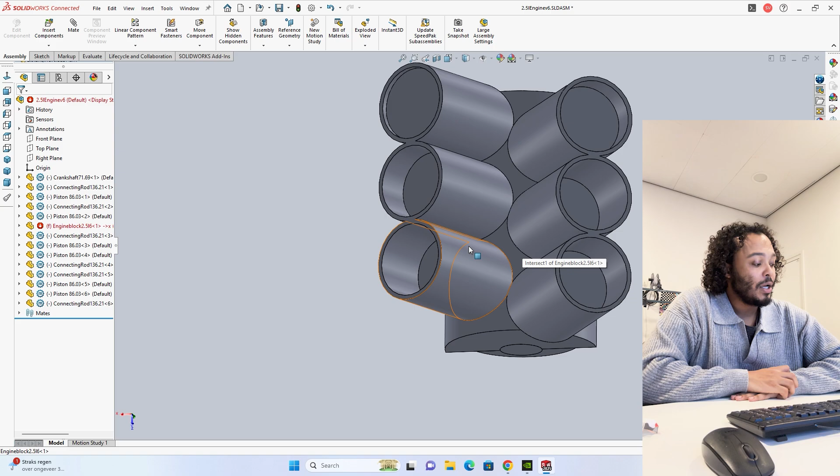Let's get into it. First and foremost, what I'm going to do is create another part based on this design. I'm going to select this side surface and add a new part to it. From this surface, I'm also going to make a sketch using the circle tool, aligning the rotation point for the crankshaft and the outer wall of the actual engine block. Let's also convert entities on those to make them a little bit more narrow.

Let's keep those at about 1 centimeter. I think in real life it would be less thick than that, but we can add and change that in a later stage. So let's make that half pipe from that surface up until that one right there, and that is basically the first part of the oil pan that we need.

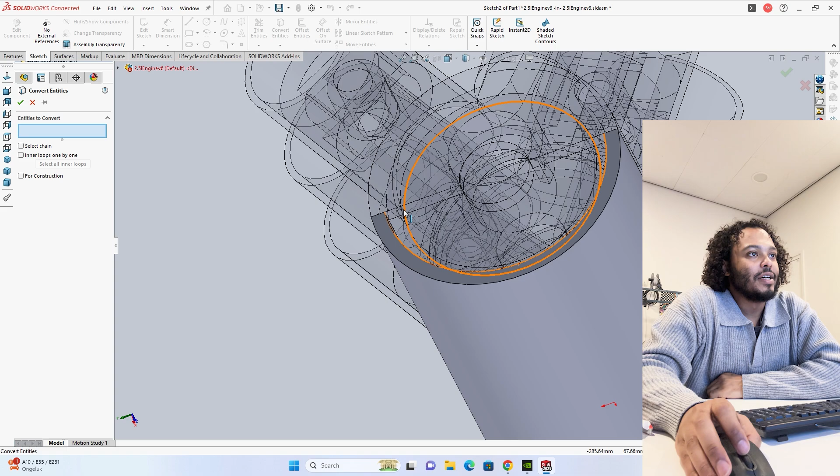Then I usually select this surface and convert entities on the bottom sketch of the engine block, so that you get the spaces in there for the crankshaft to rotate on. But also what we need to do is cut these center sections out, because we basically need to make it a hole. So we're just going to cut the hole out from the side instead.

Let's go and then trim all of those lines out of there, and that's basically the trim entities tool. I don't think I've used it before, but with that you can cut into the lines that you need. Then we're going to select that sketch. I don't really need that line, and then we're going to go up to surface, and we can select that surface right there to make sure that everything encloses it.

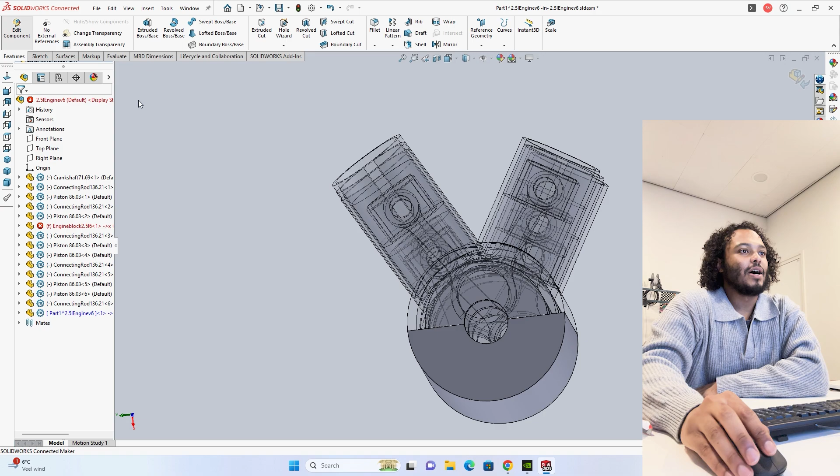And then also what we're going to add is the hole finally for the crankshaft actually rotating. There we go. And then also usually there's a flat bottom to it, because at the bottom of the oil pan, this is where the oil will be connected. So what we're basically going to do is make a system that can pump that oil out to make sure that it keeps at a certain level.

So to do that, I'm going to make 3 points within the bottom section of the oil pan that will sit from here, go to the right or left. At this point it doesn't really matter too much, but this is going to be asymmetrical, because the pump for the actual motor oil is going to sit on one side of the motor. You're not going to have the dual pump setup, at least not in this case.

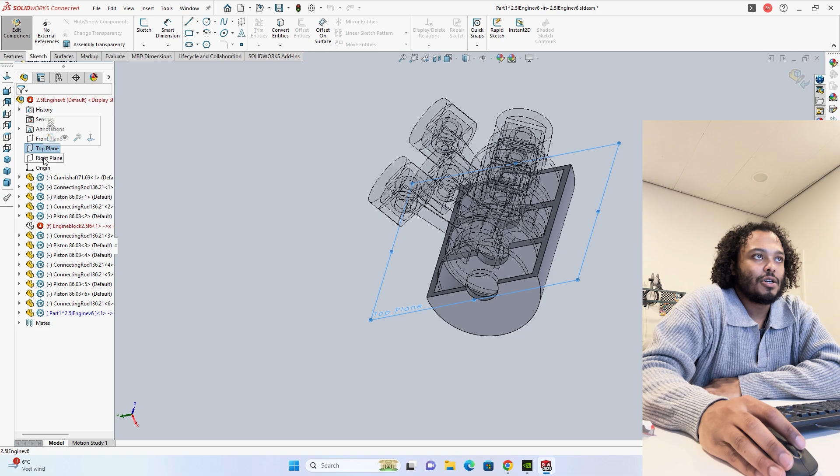So what I'm going to do is click on the oil pan again, click on edit, and then find the right plane. That will be good. And then we can click on these interior surface walls. I don't think the actual surface will work, but if you select these lines, I think that will be fine. Here we go.

And then for the final section, you can see the whole thing spaced out to where the middles will also be. Let's trim those entities off, and then we can find the middle section. Let's say one of those bumps is about 3 centimeters in diameter, so let's make it 15, and then we can make this one line up with the bottom. Let's say tangent, but let's keep that at 15 radius. And then we can take this one and place it over here as well.

From that point forward, we can extrude these circles, but now up to surface, so let's keep it up to surface, but let's start them from the side. Why isn't it showing the third one? But we're going to start it from this vertex right here. Why isn't it showing the third one?

There we go. And this would basically be the pipes that will allow for the fluids to be pumped out as soon as we need them to. So to make them pipes and hollow, we're going to select offset entities, reverse it.

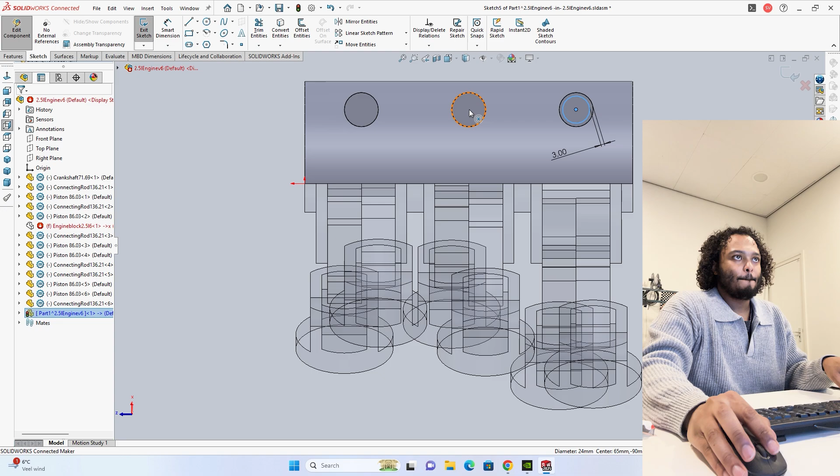Let's make it 3 millimeters for the outer wall. And then we can copy and paste this right here, and basically cut extrude those out up until this surface.

And those would basically be your motor oil evacuation pumps, in order to get all of that motor oil out as soon as they've been injected back into the system. And then we would also need to have a mount that we would place here so we can attach the motor oil pump to.

But I think I'm going to make that in a later stage when I'm actually working on the belts and everything for the connecting rods and stuff, when we're working on the cylinder heads. So for now I'll just keep it like that.

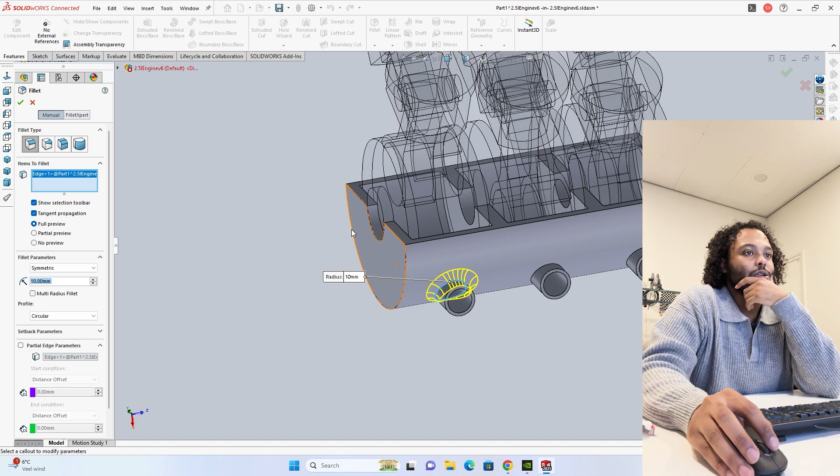It usually depends on how you would make this, if it would be a CNC cast or a CNC milled piece or a casted part, but you would have these fillets or stuff that you'd be putting around these tubes, something like that.

And then what I also need to do is add an ability to bolt this down to the motor block, because there's a lot of rotational and centrifugal forces on the crankshaft and everything, so I need to clamp the bottom end to the top end of the motor.

So what we're going to do is create a bolt pattern we can use for that specific purpose. Let's put it like that, and place like two - let's say 4 millimeter radius, so that would be like an M8 bolt or something.

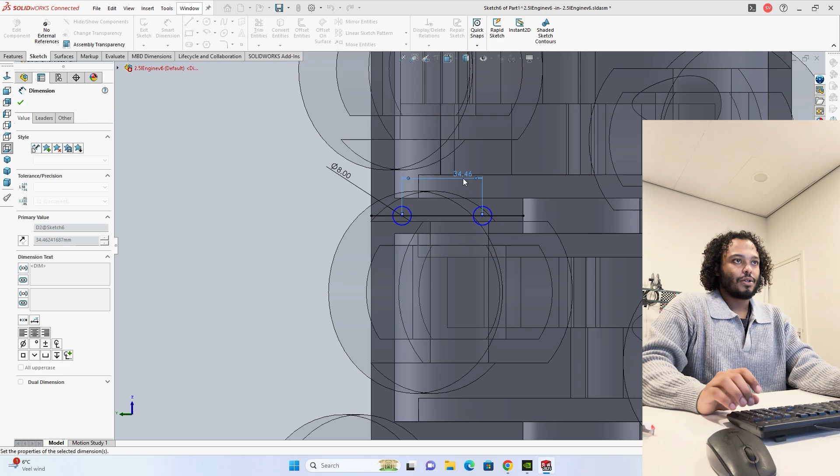Let's make it a little bit consistent, let's say 8 again, and let's say these are 30 millimeters apart - maybe 40 should be better. 40.

And let's say it's about 7.5 millimeters from this sidewall right there, or from this dot, I should say. Let's make it 10 - I think that will be somewhat centered.

And then we can basically take this and duplicate it to the whole, to the other parts. Oh no, that's not going to work like that.

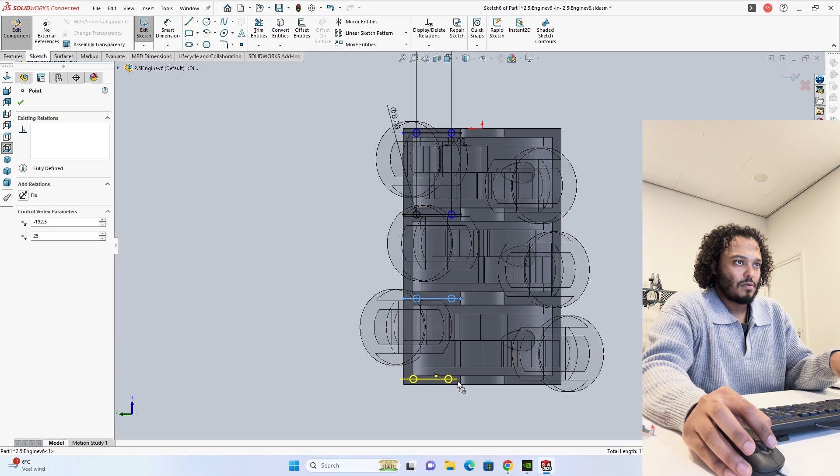And then we need to mirror that to the other side, so we can use the center point of the engine block, and mirror entities, mirror about this line right here, and there you go.

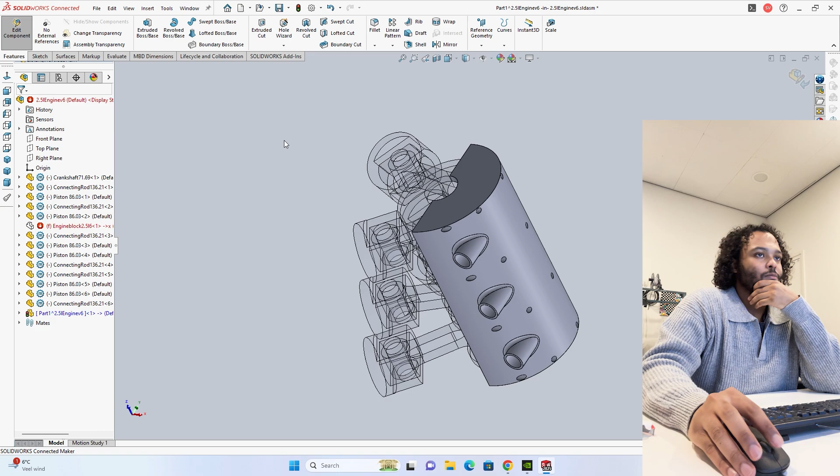So basically now I can cut extrude those, all of those circles. That would give us all of the holes that we would need, but as you can see, it would be hard to thread a hole down if it's not flush on the surface.

So what you can also do is go back into the part and drag it just right above the cut hole that we have right here. This is like the roll bar where you can select the stage of your design that you want to be in, so you can hide the last move that you just made.

And then we can also extrude basically this same shape that you have here, but we don't want it to interlink, so what we can do now is drag this through everything. I don't know if it should be through everything, but let's see - we can probably keep it a couple of millimeters above the top center.

That should be about 150, I think, or like 80 then. Yeah. And obviously you won't really be able to see that top. Let's make it 85.

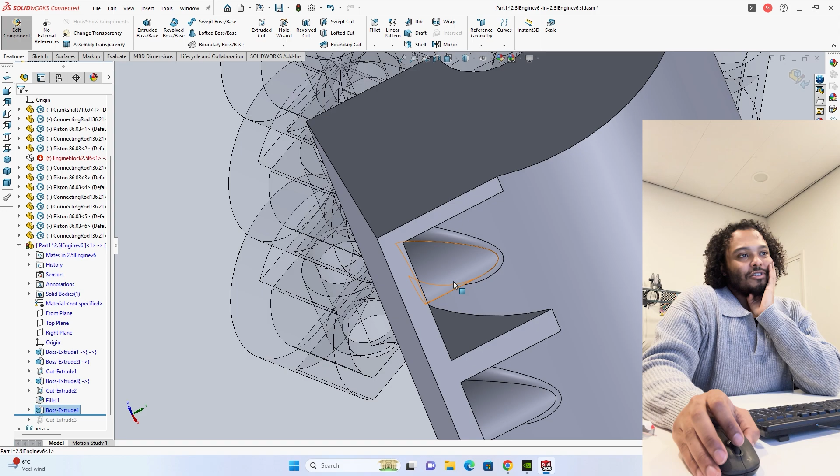And then it kind of defeats the purpose of making the holes for the drainage pumps and everything. So what we can then also do is take that hole and drag it below the boss extrude that we just made. But then we kind of need to add it, I think.

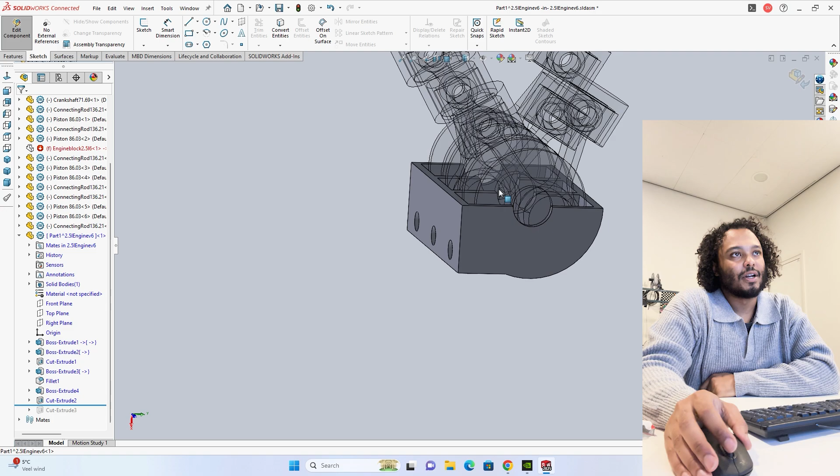So by dragging that action below the actual boss extrude and everything, it helps to figure that out and align everything the way it should. Anything else I should add? Let's also do that to the other side, by the way, otherwise it probably wouldn't make sense too much.

So let's take this sketch again, and also convert entities for those. And there you go. I think that now starts to look more and more like a recognizable engine block, in a sense.

So here we have the 3 ports that can take all of the motor oil, and we're also going to need to make a place on the engine block itself where it can be dispersed. But before that, let's add the water channels to the engine block itself. So for the water cooling, we're going to add to the existing engine block. Click on the engine block again and add it, and click on edit components.

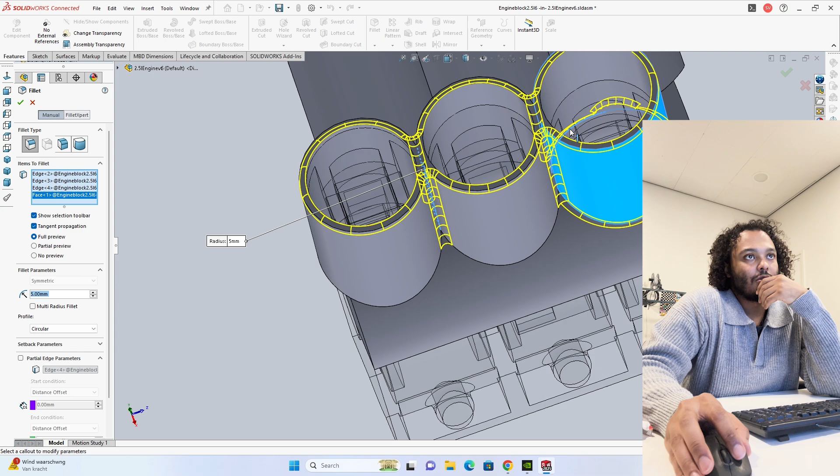First things first, we need to add the actual guide paths for the water to flow through. So I'm going to add a couple of fillets to this line right here, and ensure that there aren't too many crevices existing in that space. That's also why I think a V6 is kind of the perfect size to make, because the larger you make it, the more levels of complexity it adds.

Let's see. So now what we're gonna do is take that shape, and we're gonna need to duplicate a couple of things from the left side to the right side. I'm just going to do it on this bank of cylinders, and then you can copy the same moves again on the other side.

But in this case, all I'm gonna add is simply the water channels. And for that, I'm gonna keep a distance of about 10 millimeters between the offsets, and let's say about another 5 millimeter wall between those.

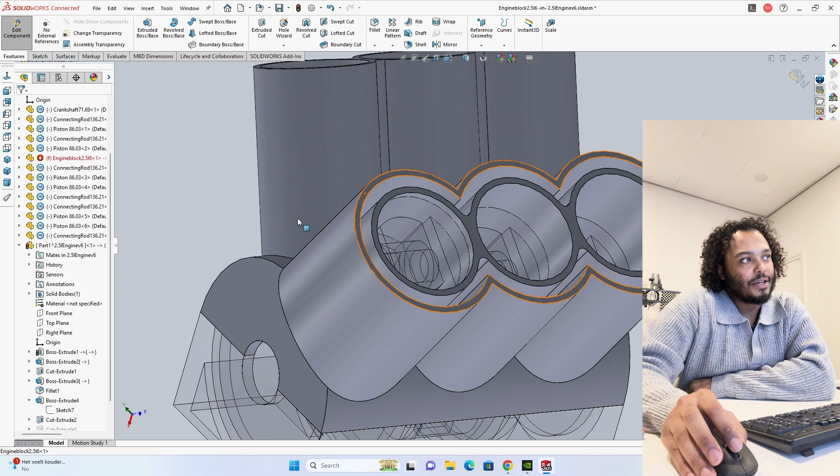And this is now going to be the actual wall where all the water will flow through, I should say. So this is basically the channel that the water will flow through, and as you can see here, there's a hole where it can escape. So we need to extrude the wall a little bit more to go beyond that point.

But I was waiting until this point to see how far I should extrude that part. That is basically the first part, because in this channel the water will be able to flow through everything like I mentioned. But we now also need to look into how we will consider that flow, and what would be the front and back side of the engine.

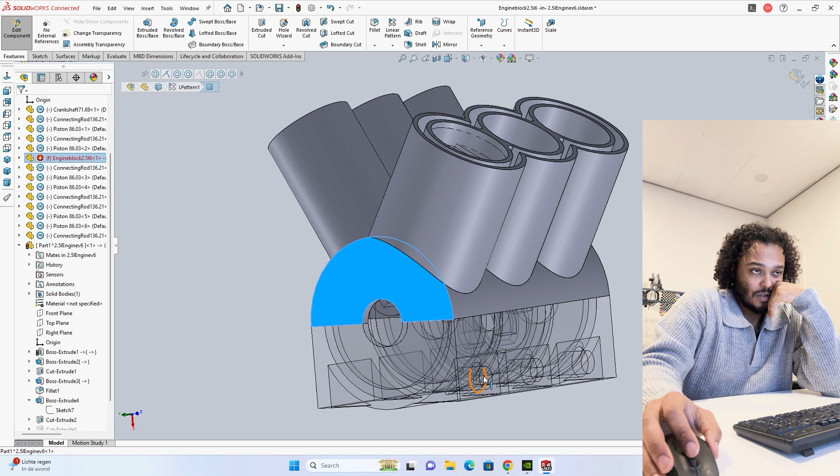Because from here on out we're going to need to make some decisions on where to locate certain things. So I'm just going to say this is the front part of the engine and this will be the back part of the engine, and the way to identify that is with the motor oil pumps sitting on the right side of the engine. That's basically how I'm going to identify it.

So here from the front, I want to let cooling water in, and here from the rear, I want to let out the hot water that has already been through the cycle. There's a couple of ways of going about it, and how you can create that flow within the system. So let's see how we can start to do something like that.

For me, the first part is going to be to make the water inlet, and for that I'm going to create a flat surface to the side here, but let's make it somewhat centered from that circle. So up to there, let's say it's about 25 millimeters that direction, and then 26 here. Let's keep that centered.

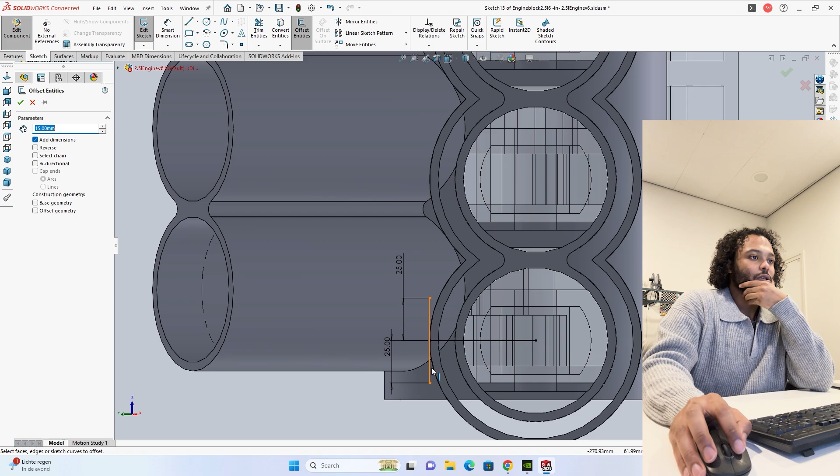And then I'm gonna do a bi-directional line, like 2 millimeters, let's say 3, 4. That is basically gonna be the surface from which we can drag the rest of the thing out. I'm just gonna do this surface now that I think about it, or I think I should do both, so then you can select both of these.

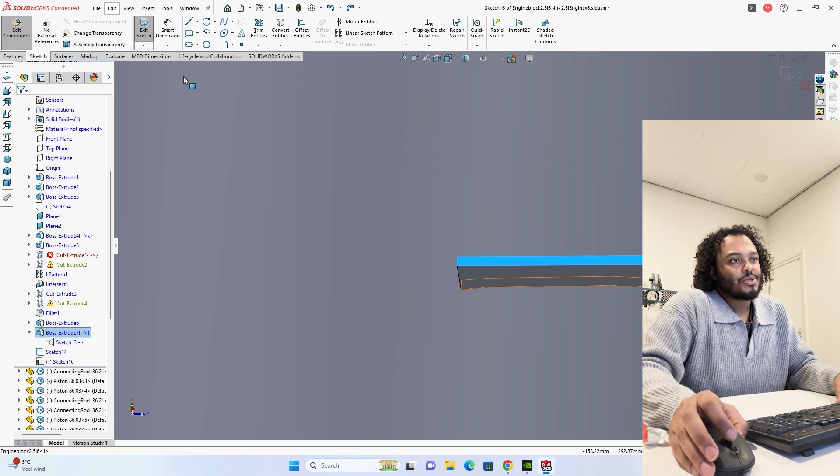Something like that would be sufficient. So now that we've created this surface, we actually have a sketch plane to work on. I could have just made a plane, I guess, but sometimes it just works like that.

And then I can take the middle point, drag a line straight down, do the same from this line right here. I think I need to select it again, and then find its middle point somewhere here. And then you have this intersecting point, and let's say I'm gonna make this 25 millimeters in radius.

And then I'm gonna offset those entities by, let's say 15, let's say 12.5, something like that. And then from these circles, I'm gonna make it like 10 millimeters, and that's where the actual hosing and the pipes and everything will be bolted down to.

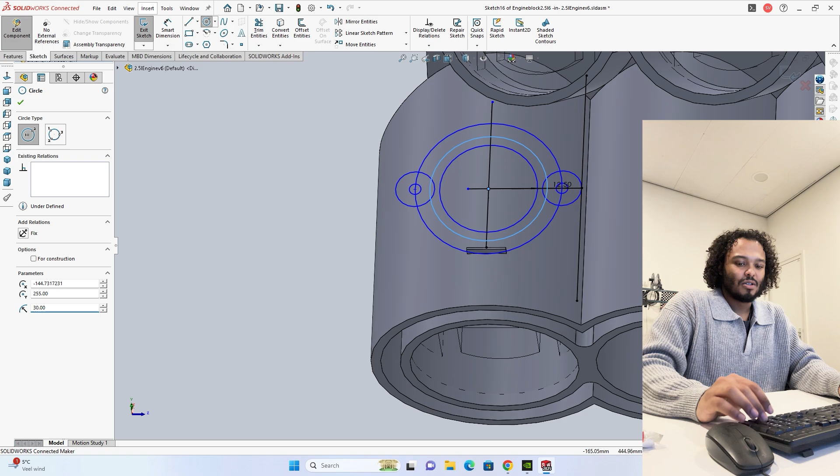And then let's make it like a 3 millimeter radius screw pattern hole or something. And then I'm gonna make it like a 35, let's say 30, I think will be good. 30 millimeter radius for the actual circle that it will fit in.

And then we can extrude boss base all of those surfaces that we select for the actual piping and everything.

Here we go. And then up the surface, so it will kind of fall perfectly to the side of the wall. And then there you have the first attachment that you would need to actually have some plumbing and everything attached to the motor.

And now we're gonna make also a hole to make sure that the water can actually flow through it. Let's see, right there.

And then we will need that one to go up to that surface and continue on into the actual sidewall itself. But I'm actually also gonna add one more thing to it, that cut extrude that it just made, and that is this little tab that I used to kind of make the sketch surface.

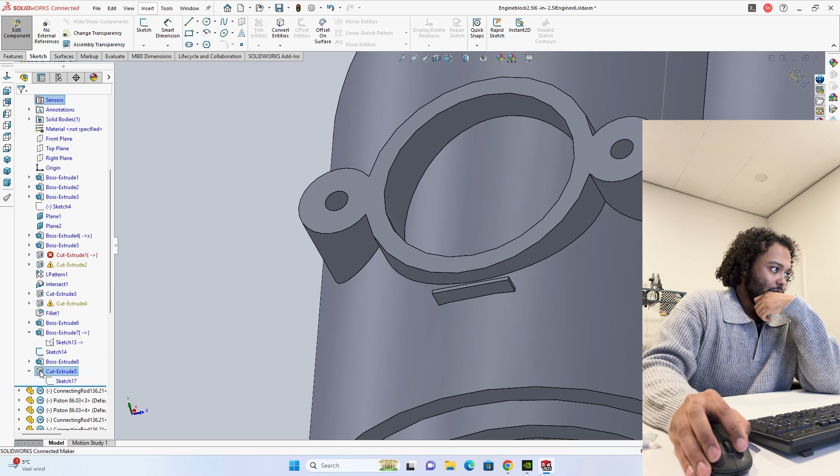So I'm gonna add that to the actual sketch, use convert entities also on those. And then from that point forward, you can see that now it's been cut through completely, but that was not intended. Also, yes, I guess I do need to make it into two separate.

Yeah, I can just stitch this back up again this way. I guess it doesn't matter too much. But like I said in the previous video, that kind of is the freedom that you have within SolidWorks to do it your way. Multiple ways of going about it that will get you the same result.

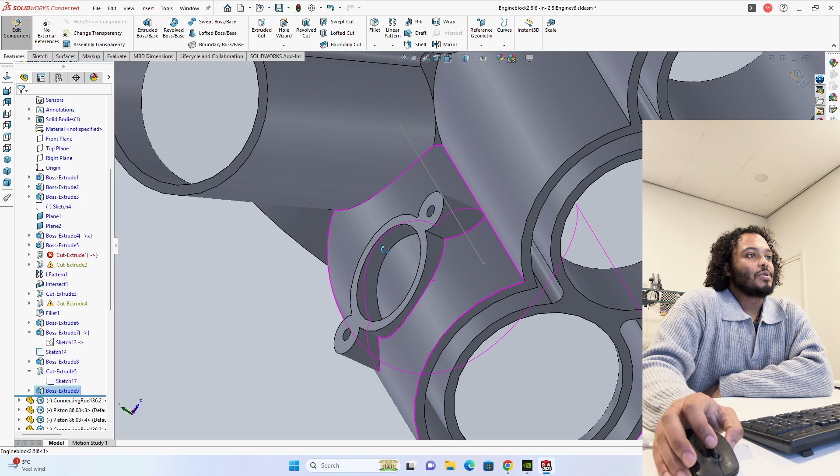So that is basically now the first component. Let's also add some fillets and stuff to the basic engine block.

So before I even place those, because I feel like those will interfere with each other a little bit, let's add this fillet curvature also to it.

And these shapes, by the way, also make engine blocks extremely strong shapes and everything, because it's just a lot of circular shapes and different angles standing against each other.

So yeah, sometimes you see that some car manufacturers use the motor to actually also mount the suspension components to it, or as a structural member of the frame, and that's basically why, because all of these circular shapes interacting with each other make for an extremely strong structure.

So then we can take this bar again, put it back in the rollback state, and then you'll see these kind of come into play.

And then also for this surface, I'm going to add some fillets to it and the corners here.

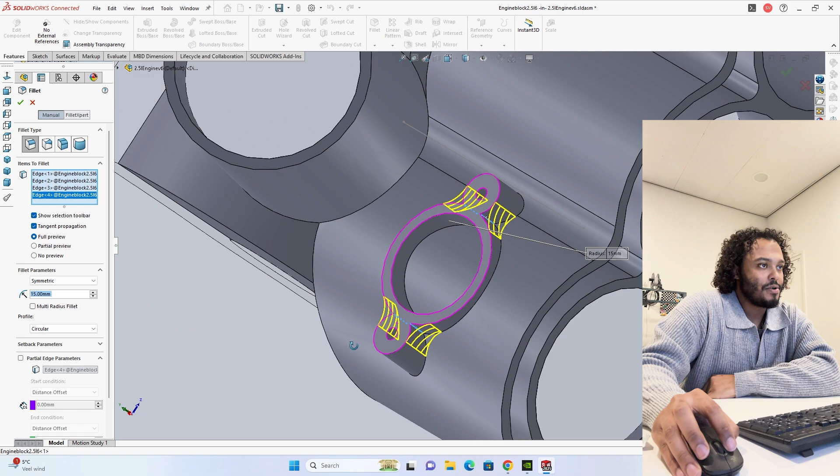Also make it a little bit of a surface area for like gaskets and stuff if you want to prevent leakages. All that type of stuff kind of comes into play when it comes to making these type of parts, especially if you're dealing with fluids that are pumping through a surface and stuff, you know.

So that is the first part. And then basically what we'll have is also the same right here, and then there will be one pump, like a pipe that's splitting into two, that is feeding cold engine air or cold engine water that has just been through the radiators right in here.

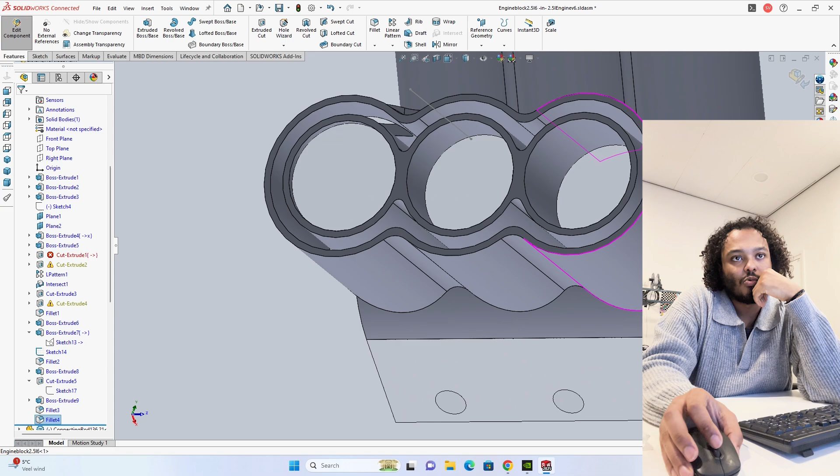And then that will be able to flow through all of the cylinders, and then there will be an extraction point right here. So that is also the next thing that we're gonna make, is basically the same thing but then end up making it here.

So what we're gonna do for that is actually take this and click on extrude cut, click on convert entities. Let's also use the actual bolt patterns and everything, and also the hole itself in the convert entity, so we have all of those dimensions already lined up.

And then we're gonna take this middle point to basically transfer it over to the other side.

Mirror entities to mirror those, and we want to mirror that about that point right there. We don't need it to copy, we just need it to be transferred to that side.

Basically boss extrude it up to this surface again, but we don't want it here. We want it to actually offset, like so.

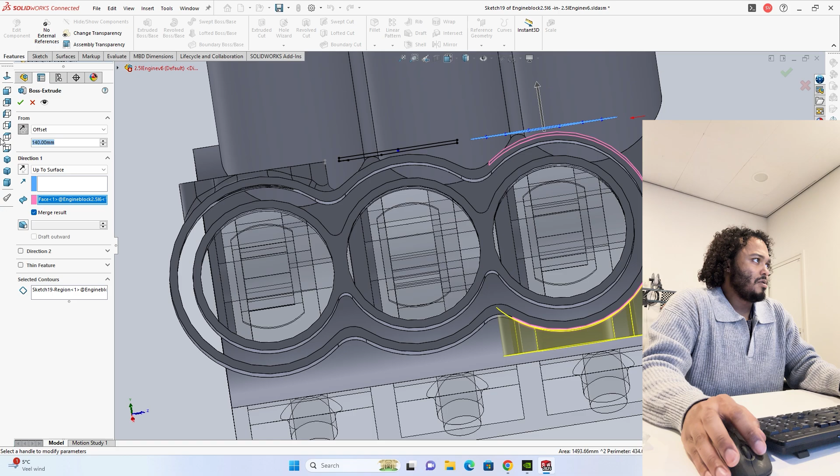Let's say it's like 135, I think, then something like that would be kind of similar to what we have on the other side. And then we need to cut it, cut the hole out.

And there you go. Also, let's add the fillet to it as well. Or what you can also do is basically take the fillet and drag it below the latest pieces that we just added, and then right click it, add it, and then also add it to this part, so that we can use less moves in total to get the same thing accomplished.

I don't know if that makes the files larger, or if you have like a taller feature tree. I have no clue. I should test it actually, but we'll see.

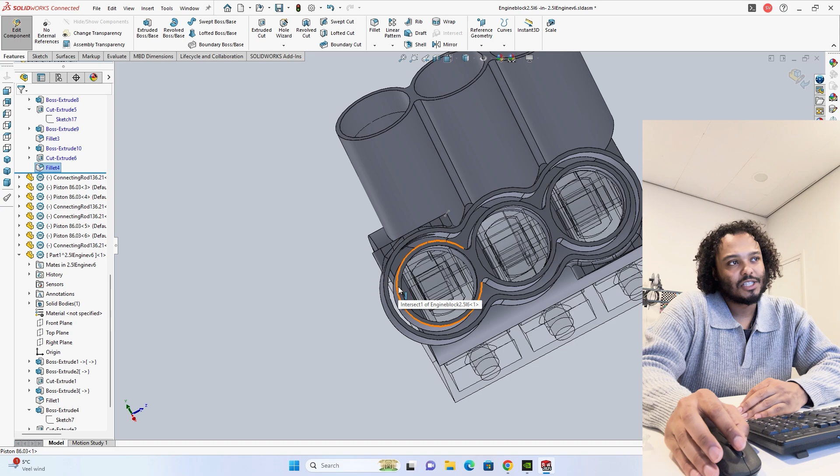Just in case you haven't picked up, the cold water that just been through the radiator will flow through all of these and then exit here. And I was also thinking maybe you can add channels to guide it better and make sure that the flow is optimized internally, in order to also use the least amount of cooling that you actually require.

But there's still a lot we can figure out and get into in later parts of the video.

The next thing that I do want to get into are the actual bolts that are gonna attach the cylinder head to the engine block.

So those usually sit right within these sections to separate the power points and everything, or the stress I should say. So those will be quite significant, you know. So those are also like strong bolts.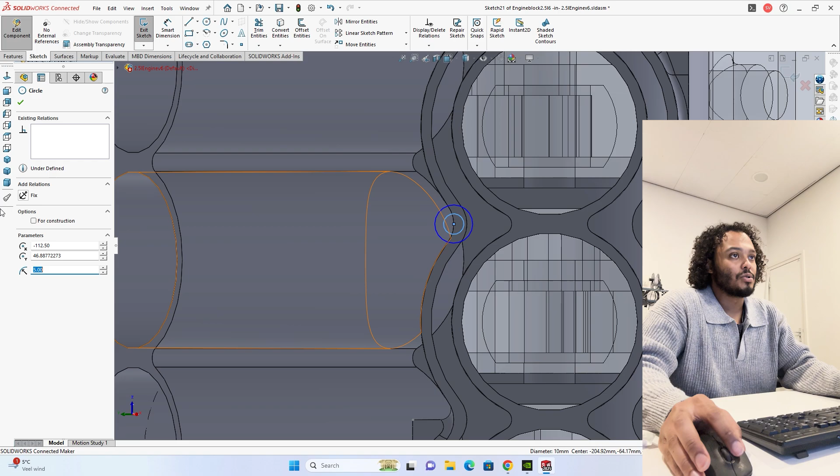Let's use like an M10 pattern or something, and also make a 10mm outer ring. And then I'm gonna use these on the same points that we've added those to.

And then for the next part, I'm just gonna make it intersect right at that point. And let's also do the same right here.

You could also make a pattern which is equal left to right and everything, so that you can make the cylinder heads a little bit more modular in a sense. But for this case I think I'm just gonna make it a little bit more custom.

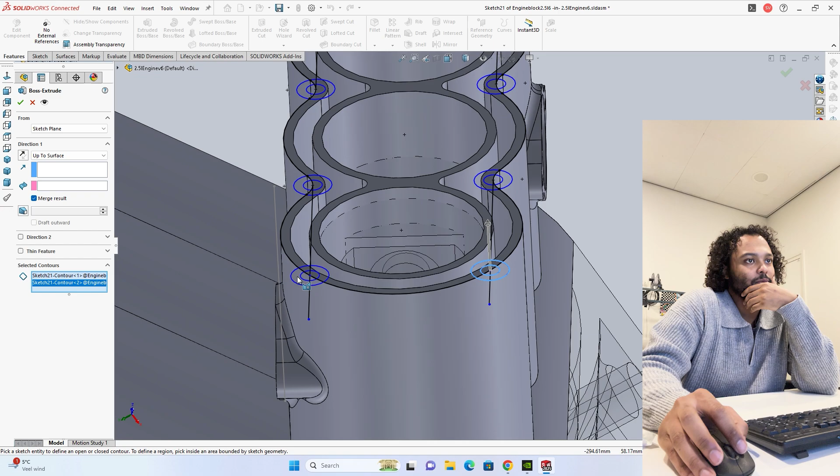Like so. And then basically what we can do from here is drag them down all the way to the bottom section, all the way to this half circle again.

And then we also need to cut extrude all the holes, obviously, same kind of pattern. So just use the same sketch, click on convert entities, and then take all of those bolts out. And let's make that, you know, let's just keep it up to surface again, I guess.

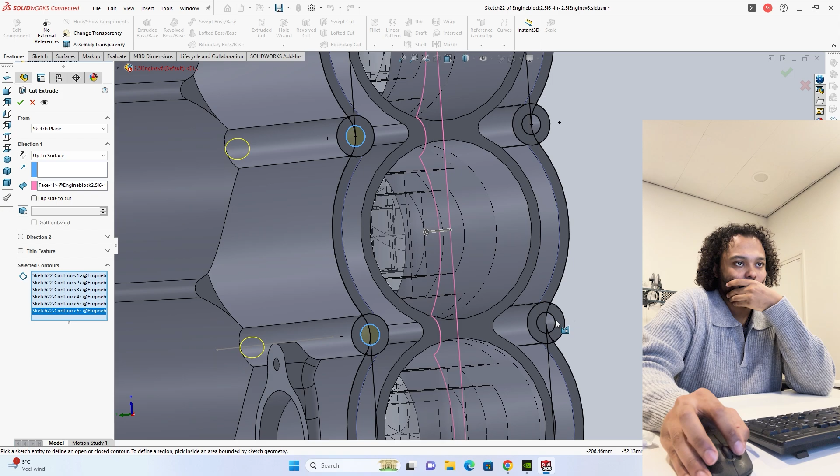And now that we've cut all of those holes out, it starts to look more and more like an engine block, yeah, like you would see it in real life, I guess. And that is also the purpose of this video in particular, to get that resemblance.

But also make it in a way where these bolts are actually in there, so that we can also 3D print it and actually produce it, because that is kind of what I feel like these tutorials should have, is that we also showcase the process of actually making this a reality.

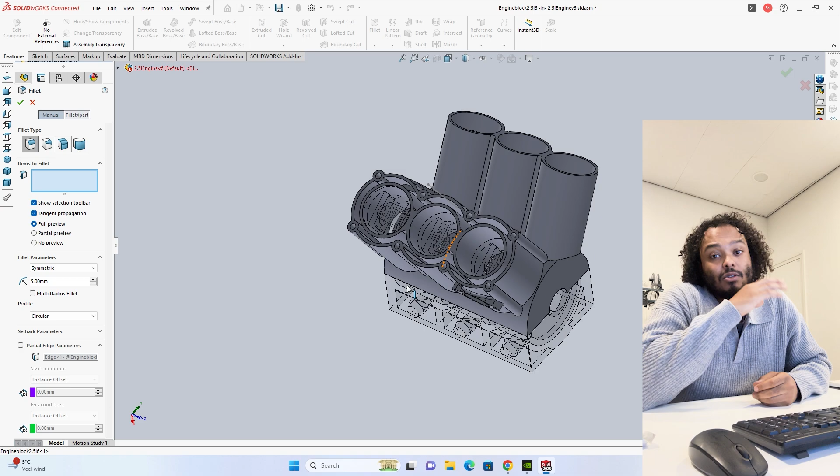So that is gonna come after the complete engine is finished, but you can look out for that. I'm gonna 3D print everything that you see here, but at scale. So we're gonna change it before we print it as well, but you'll see. Let's see, what am I forgetting before I move on to the next part?

I think this is everything for the engine block. I think maybe the motor oil channels too, but I could do that once I've also added the other side. I think that will be better. So yeah, next I'm gonna basically do everything I did here and then duplicate it onto the other side.

But I'm looking at a method that I could use to kind of expedite the process a little bit. I think I know what I'm gonna do. Yeah, I'm gonna add the fillets also to the bolt patterns. Can I select all of these at once? I think I can. There you go.

Let's make that like a 5mm radius if possible. There you go.

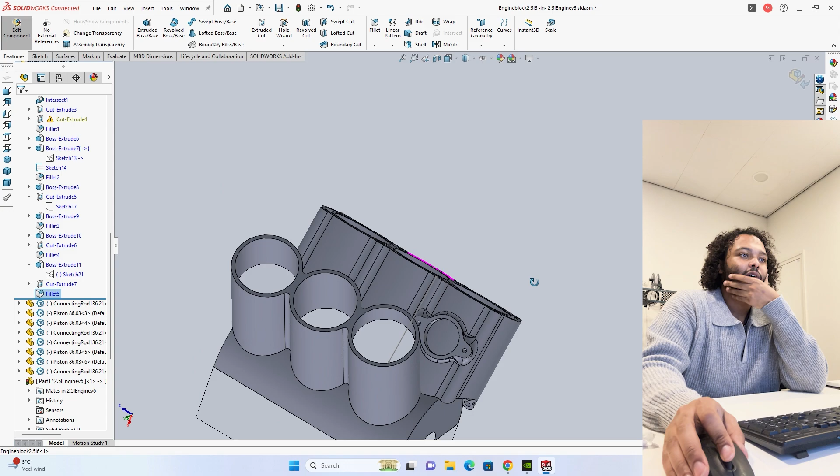And now with that in place, let's select this face again. And also, because we have added these bolt patterns and stuff, there's usually some cross members that engineers end up making between all of these lattice works and stuff. And I'll show that in a second. It will kind of allow a little bit more rigidity between the actual piston walls themselves and the outer wall of the engine block.

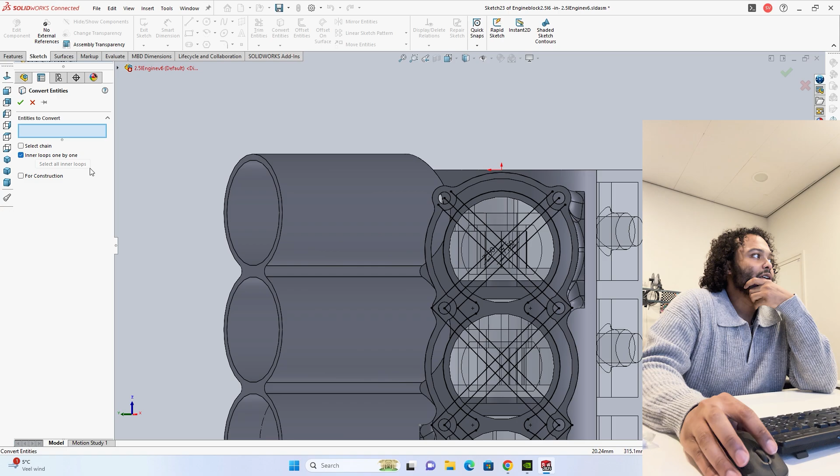And I'll basically use offset entities both directions, let's say 7.5, something like that. And then offset entities again, select this surface, and inner loops one by one selected, again select that one. And then from that point forward, we can basically extrude all of these shapes.

And let's make that about, let's say, 10mm go into the engine block. There you go.

And then also I will always kind of add a fillet to also all the sharp corners. I think that will be good, but let's say it's only like 3 millimeters or something.

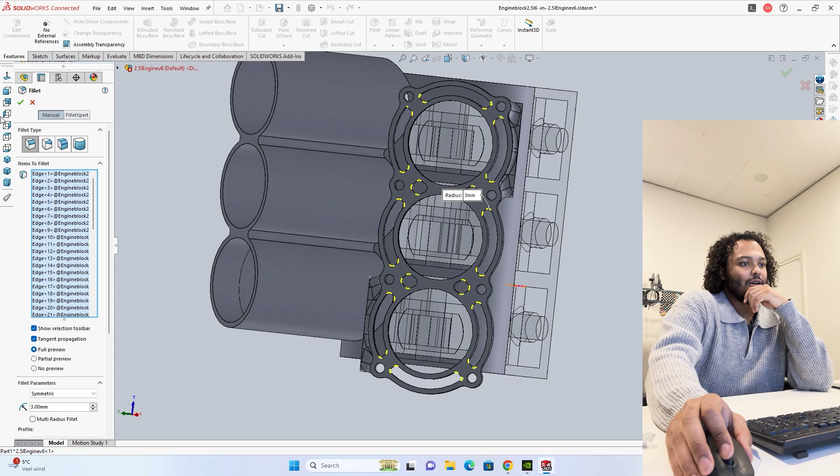I think there are a couple of double lines in there. And that was actually the perfect one to take out, I guess. Something like that. I guess it's still not gonna work. Let's take all of these out. We can add those at a later stage.

And then keep this at 5, 10, 8, somewhere. There you go. And then these holes, the reason why I don't really like fully closing it off, because you...

Actually maybe could even, but these holes would then allow the water to kind of flow also into the cylinder head, because with the cylinder head there's also a lot of hot exhaust gases coming in and stuff like that, you know. So you kind of want to maintain that at a lower temperature.

But it might also be cool to look at that, maybe close it off at this end of the motor, because here only the air intake will be coming in, so you don't need to have maybe warm water running through it, and I don't know, we'll see.

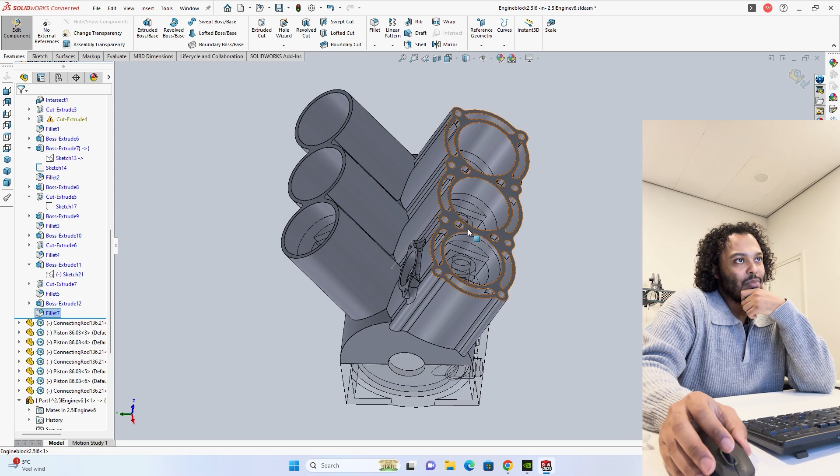But that is the first part, and basically now what I want to do is copy this until this section and then just extrude everything at once.

Oh, but for that I could actually maybe do it better before I add these lines. Yeah, I think that was better.

So again, I could just select that surface, click on sketch, click convert entities, yes, but also the inner loops.

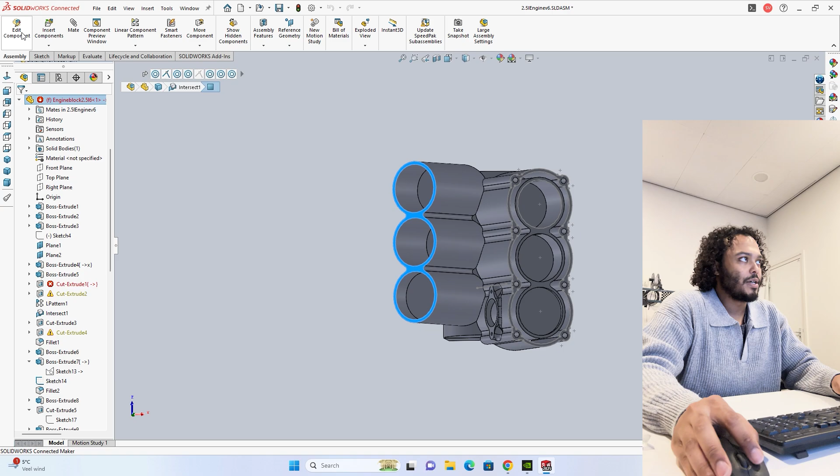And then just for reference, I'm gonna use this circle, and then I'm gonna take all of it and copy, select this surface, edit component, sketch, copy, paste, and then you get the entire sketch, but it's not lined up properly.

So then you click move entities, and you can also adjust the coordinates and everything, but the reason I've put the sketch in there is so I can reference it right to the middle of it, and then it's just perfectly in place right away.

And now we can also extrude all of these up to there. Yeah, that's perfect.

And then from that point forward, I only need to make the holes and add the water pumping and everything, you know. But also let's add this to it though, because we're also gonna add that to the same oil pan, and it is basically the outer line to actually make sure that everything is fully sealed up.

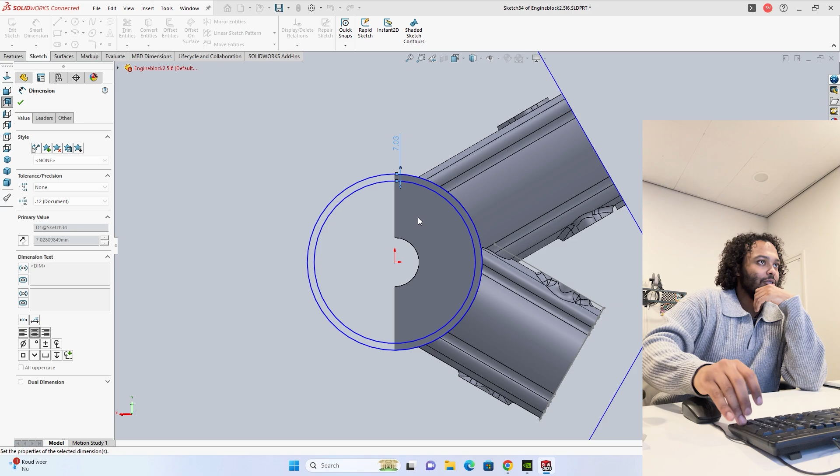But let's also convert those entities. And what I'm gonna do for that is select through all, and that is gonna need to go through all of the dimensions, and I'm gonna do that on both sides to make sure that it's just kind of surrounding everything.

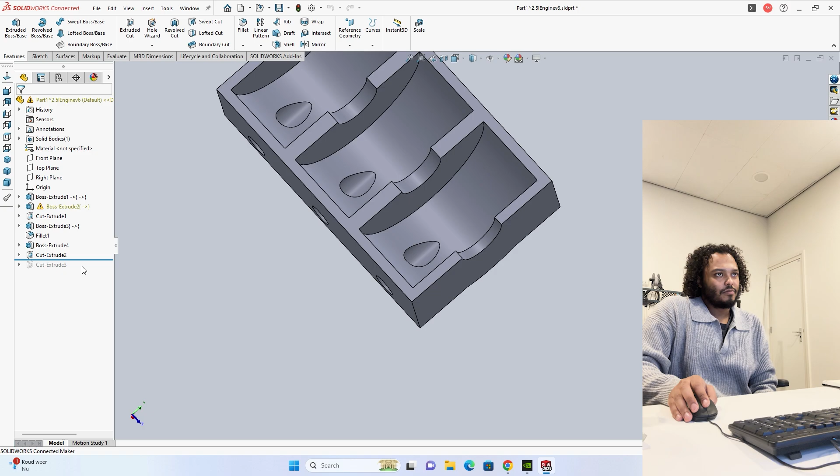There you go. Let's see, because I feel like I could have made a little bit of a difference there. Let's add the cut extrude.

I'm thinking about maybe adding this hole a little bit more towards the outside, so you can, but it would only be like a visual thing. I think I can keep it like this, to be honest with you.

So let's first just add the additional spacers, I guess, that we need for the engine block to fully align with everything.

I need to cut it in half still. Convert entities. Up to surface, attach it right there, and then do the same on the other side.

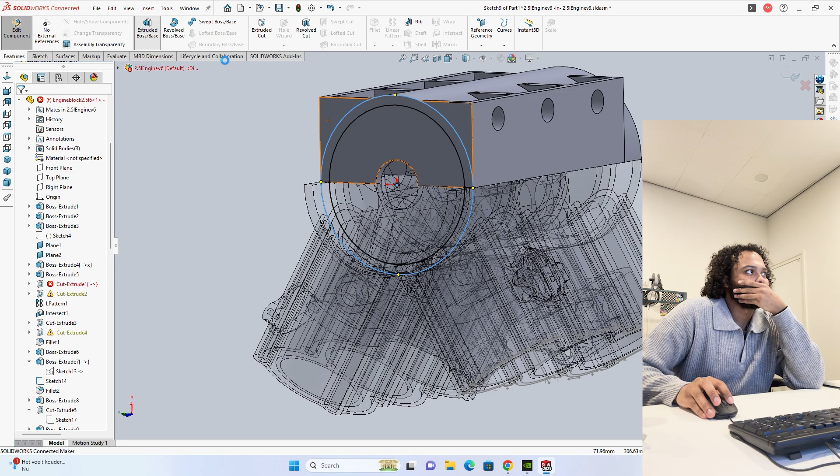And for that, we basically gonna take this, select the engine block, use edit components, select this surface, convert entities, and then select all of the hole patterns that need to line up.

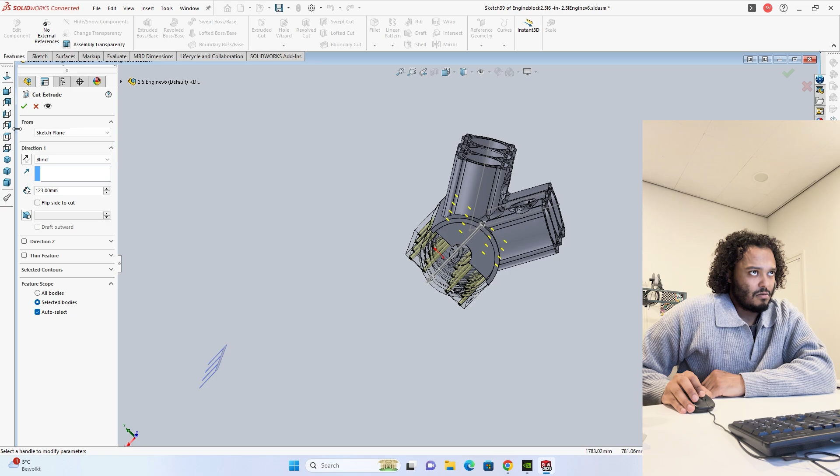And then we can take all of those and basically cut extrude in the engine block to about, I don't know, let's say something like that. You don't want to see them fully come out of the engine block, but those will be threaded studs and everything in there, so you don't have to screw them all the way through.

The only thing that I actually should still add is the oil and lubrication lines that are gonna be within everything. So then the next video we can just fully focus on making these different subcomponents and stuff.

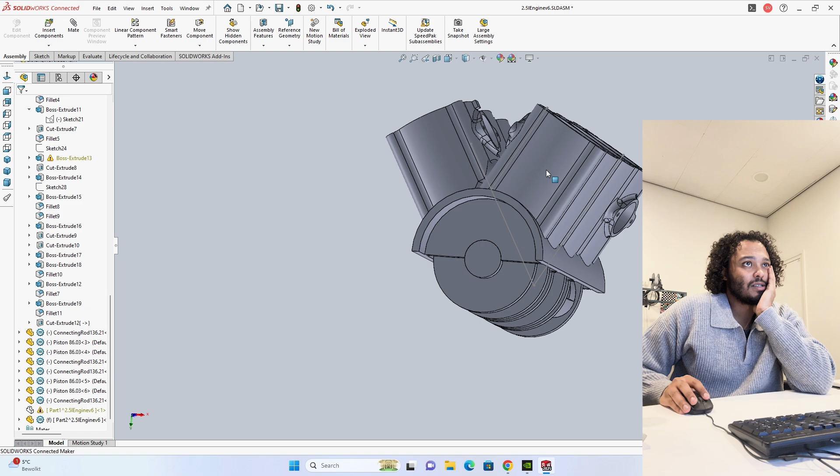So the motor oil is gonna be sprayed from underneath, I wanna say. Usually that's the case where you have these railings and everything sitting in there, and then you have nozzles that are constantly spraying the bearings and the crankshaft and everything, also the side of the piston walls.

So there will usually be one big channel right down the middle here, where the main oil line sits, and then there could be little sub channels sitting in different spaces where you have nozzles that are jetting oil into the cylinder walls and everything to make sure everything maintains its lubrication.

But in our case, I'm gonna add one main oil line down the center of the block, and from there gonna be like 3 nozzles, I want to say, one pointing directly down onto the crankshaft, and then 2 to the sides, 1 to each cylinder wall. So let's make that last tube, and then that will be everything for this video tutorial.

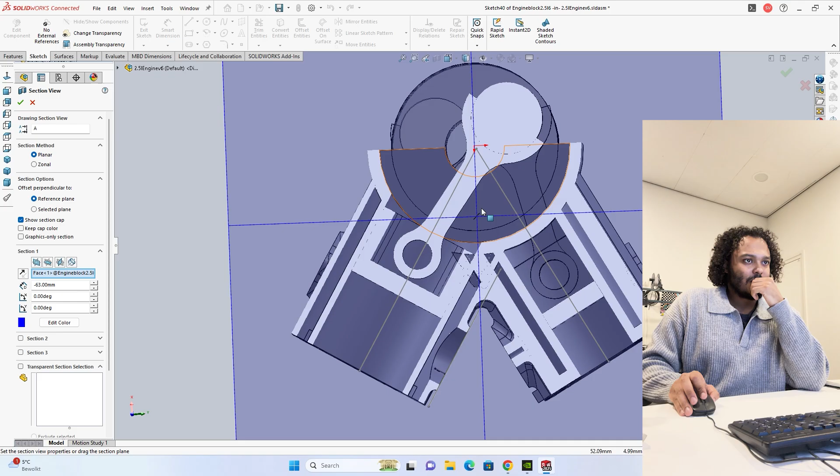But let's kind of see it from the side view, where everything is intersecting, because that is also a good opportunity to use that non-used space, to kind of incorporate that into it. So that's why I want to look at it from the center, and then use this as a convert entity.

And then from here, let's draw a line to the top, and that is 47 millimeters. So let's say in about here, if you would have a 20 millimeter radius.

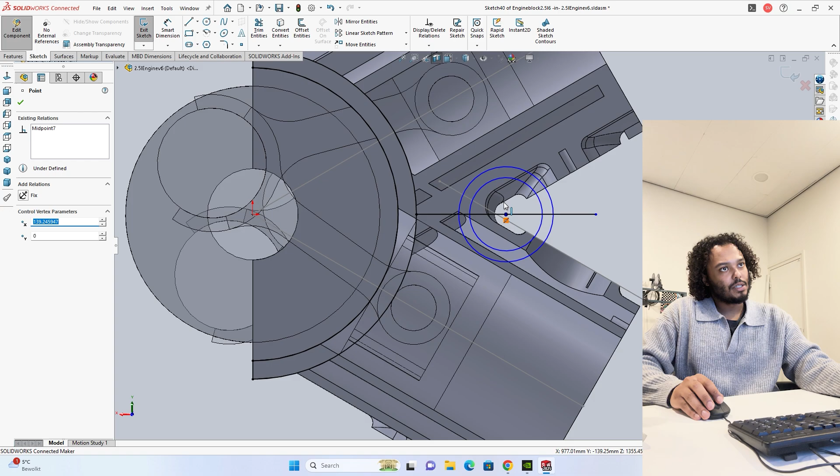But we also need to take into consideration that it can't come into contact with any of those cylinder walls. Right here it wouldn't be good because it would already flow right through it, you can actually see the piston itself, so we need to raise it still. And from this point forward, it is no longer intersecting with the actual pistons or the cylinder walls and anything. But then you can also see that it is interacting with the hole for the actual water pump.

So this should be tinier, let's say maybe 15 millimeters, and then something like that.

Maybe a little bit bigger, like if we put it here, say 17.5, and then let's say this will be 22.5. I think this will be good.

I don't think it will. Oh, I think it will still interfere with that bar right there. Drag it down a little bit.

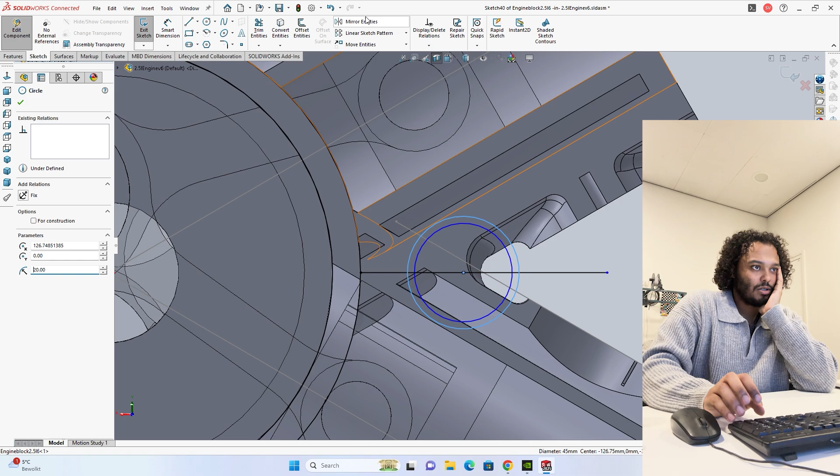If it sits right there and I make this one 20, there we go. That should fit perfect. And then we're gonna add it from this part all the way to the end of the motor, like so.

And maybe I can remove this fillet right here because it's probably not gonna do too much anymore. And then add a fillet to the outer ring section right there, something like that.

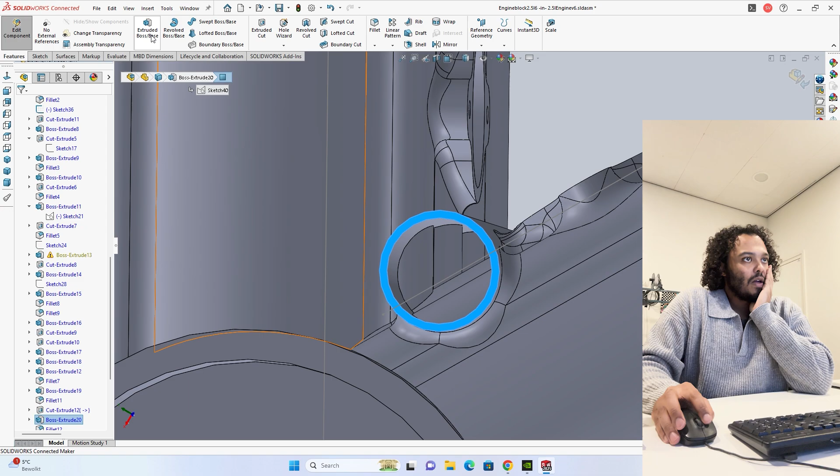And 5 is probably the biggest that we'll get to. In that case, let's just keep it at that. And then we're gonna cut extrude out everything that is within that pipe.

Make sure that everything is still centered. Kind of looks a little bit off balance, but I think it's just a play of the eyes with one of the pistons kind of overlapping the other.

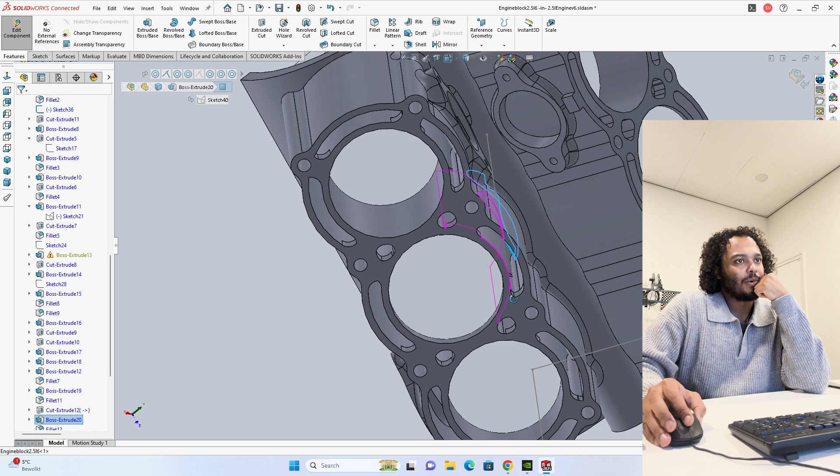And then from this point, this is, by the way, also cutting off the water. So no, I don't think it is, not fully at least. It will kind of still allow it to flow through it and to the sides. Yes, no, that's perfect. Let's also add the fillet to the other side.

Maybe we'll get to that in a later point, if it allows us to add a little bit more of a fillet range to it. And then from here, we need to add the holes basically to the whole chamber.

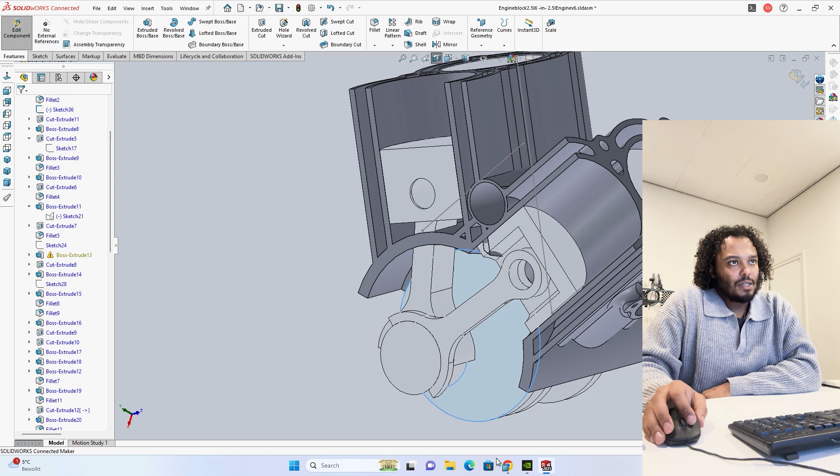Let's also use that side part. So what we can see here is that if we rotate this piston, it actually isn't fully getting down towards this section. So if we were to place a nozzle right here that would squirt out the motor oil, I think it would work pretty good, because the rotation of the pistons would just throw motor oil everywhere anyway.

But if we have one nozzle directly directed here, pointing a little bit more upward towards the bottom end of the piston, it would spray it around throughout this whole combustion chamber. So I'm gonna make one hole that is to the side from here, but also at like a 60-degree angle from the center point, and then one hole that's just straight down until the pumps here.

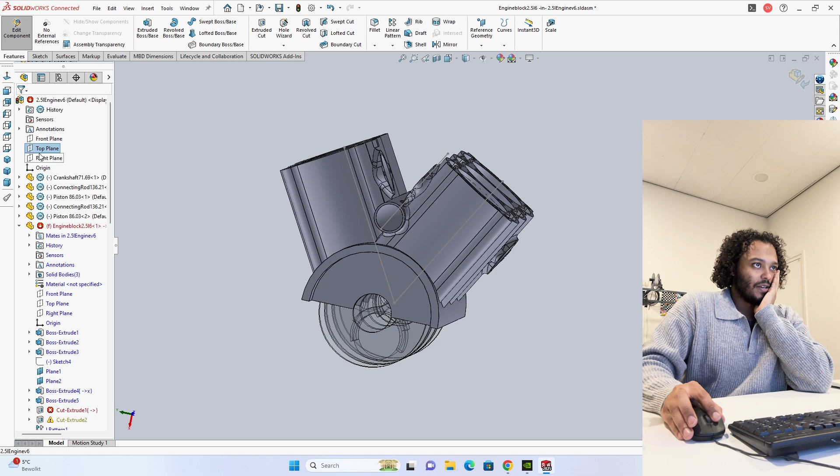So what I want to do is actually get into the right plane. Let's convert entities on the sidelines of this pipe. If I can also get the top one. There you go. And then from that point forward, if you also select these surfaces, we can find the midpoints and basically place the nozzle there.

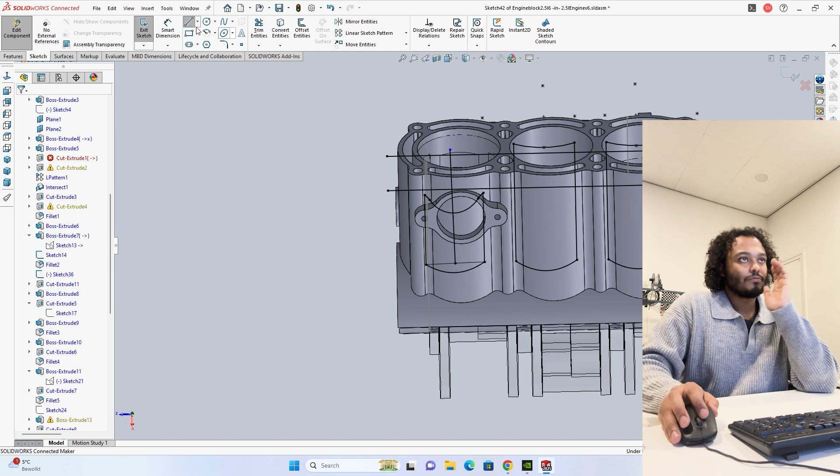So that would mean that we would need to put them right there. So let's cut those off. And then let's say like a 2mm hole, I would say. And then cut extrude.

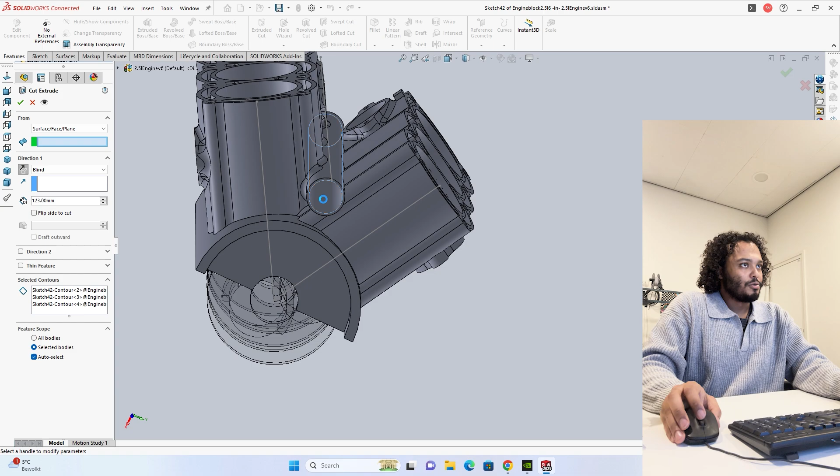And then up to surface, but which surface? I don't think it should be up to surface though. Let's keep it blind, but let's extrude from the surface. There you go. Good. Then the other direction, and I want it to be maybe 50 or something, shouldn't be too extreme.

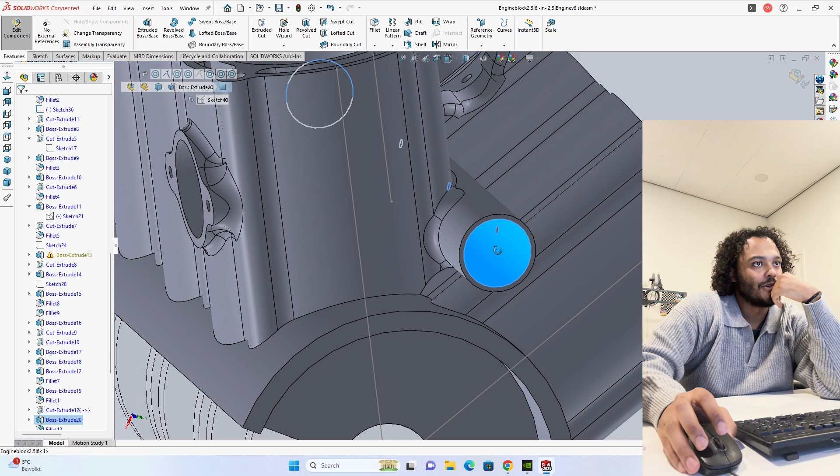So now you can see here these holes that would basically allow the high pressure motor oil to be pumped out through those. And then we're gonna do the same on the other bank, but also make them point down.

So let's start off with the same sketch, I guess. So we can select that same cut extrude. But instead, we're just gonna take those circles and move them onto that level. So let's take these. Move entities from 2 right there.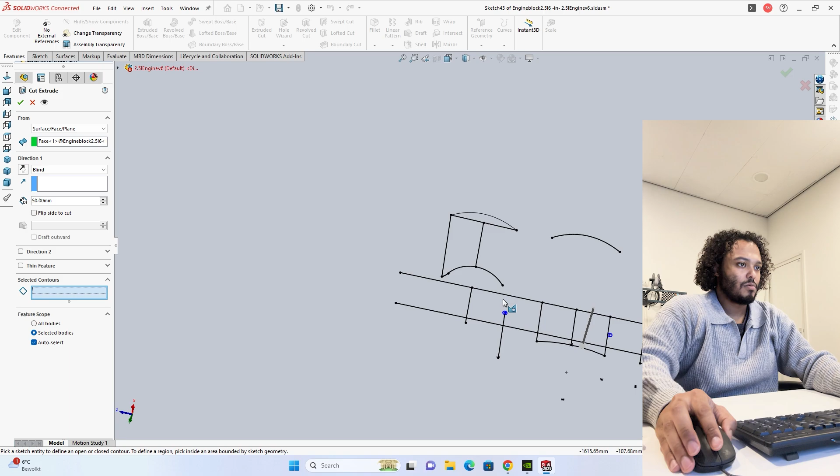And then with that, we can take those and do the same thing again. So cut extrude from surface, this surface, select which contours you want it to cut.

So now we have motor oil going through both sides of the pistons to the banks. Let's see if you can also see it here. There you go. And now for the final part, we're only going to add it to the bottom section right here.

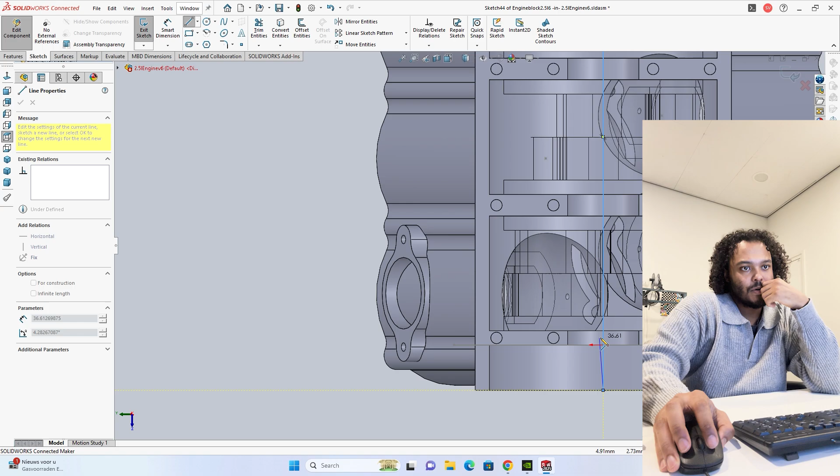And I've seen also some motor producers do it directly onto the parts where the crankshaft is rotating, so we could just throw it in there, I guess. Cut extrude from here, and let's draw a line down the middle, right here in the middle.

Let's also do a convert entities on all those sections so you can find those middle points. And then we also know that this is basically the center point for this crankshaft, or for that connecting rod I should say, and this is the next one. So basically we want to have one of those points in there for each one of them. Everywhere the lines cross, that's where we're gonna have those nozzles.

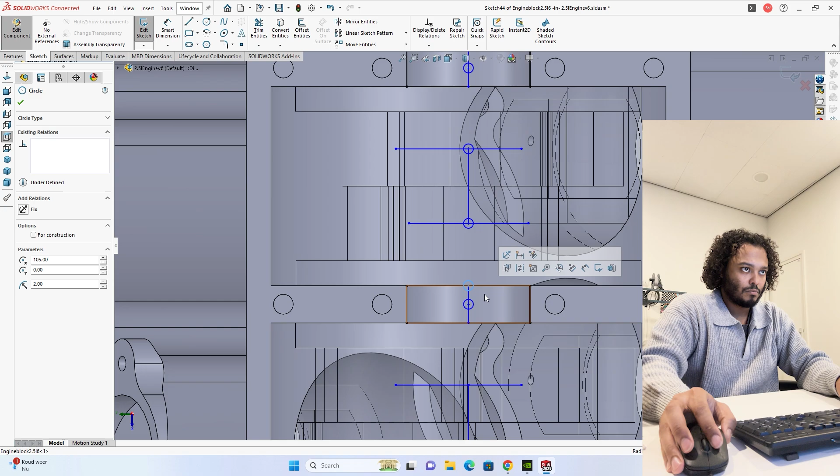So now we got all of those holes selected. Now let's cut extrude all of them up until that point where we need it to.

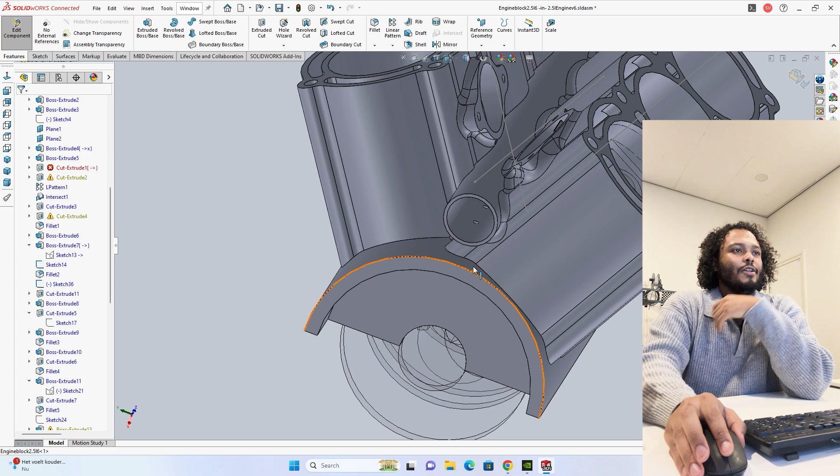So now we got all of those holes also lined up with the actual bearings and everything within the engine block. But now I'm kind of looking into if you would actually need to add some outer walls to it, because I feel like there will be intersecting parts where there's not actually a full hole or anything. So like you can see here, this hole doesn't have any surrounding to it, and I do feel like we're gonna need some of that.

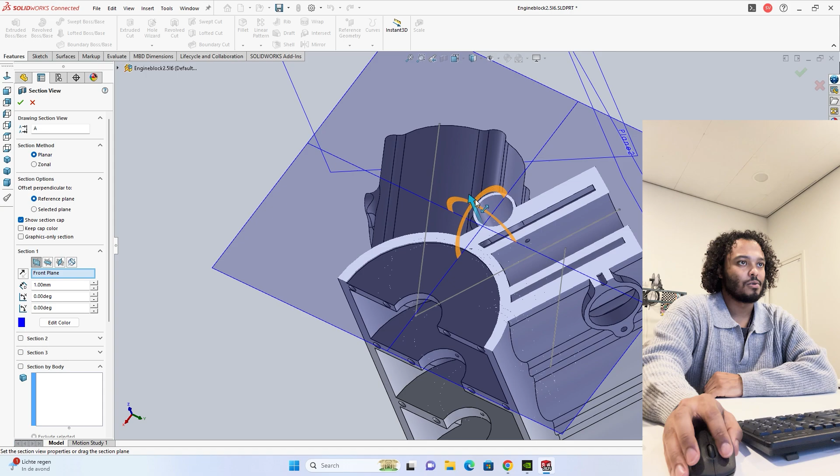So yeah, let's add that still, and that's the actual last thing to do. Let's select this surface once more, and then before we do that, let's also cut out all of the rest of the cylinder walls and things that we don't need, because I feel like that's also gonna help out a little bit with aligning everything.

So we're gonna take these again. That's weird though. Part one, and then let's also do that here.

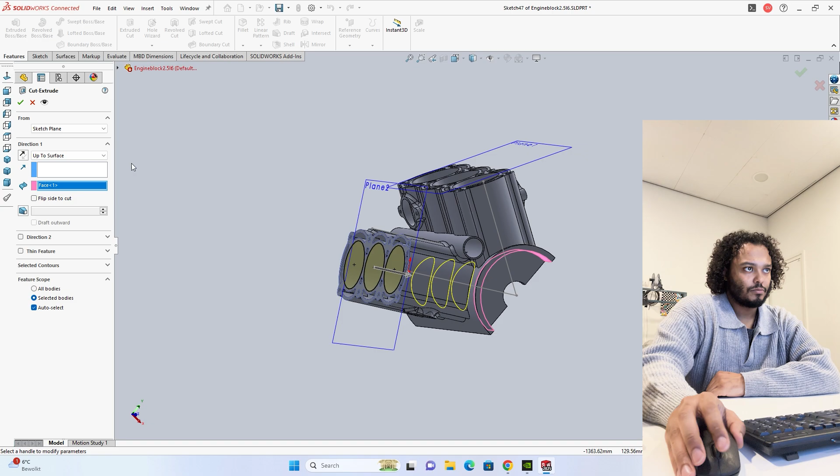So now we've cleared those out, and you can see those holes portruding from the engine block. I think it would be handy to have a rail or something right there in the middle, or would this actually be better still? I don't know.

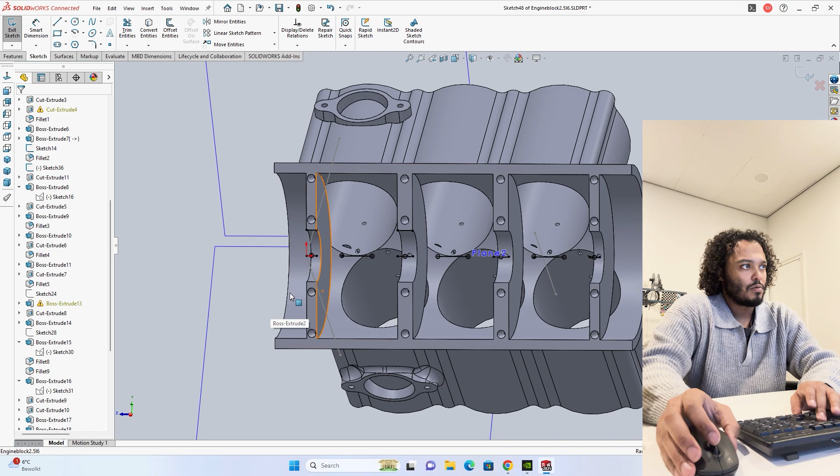Let's just make the channels for it. I'm gonna take all of those outer sketches and stuff that we don't need and remove those, and then we'll only be left with the sketches themselves.

Actually we probably don't need it there. I think there will be a solid block between the bearings and stuff. But then we can take this whole line.

Let's take these two out again and click offset entities. I think 5 would be sufficient. And then let's extrude boss base them from this surface.

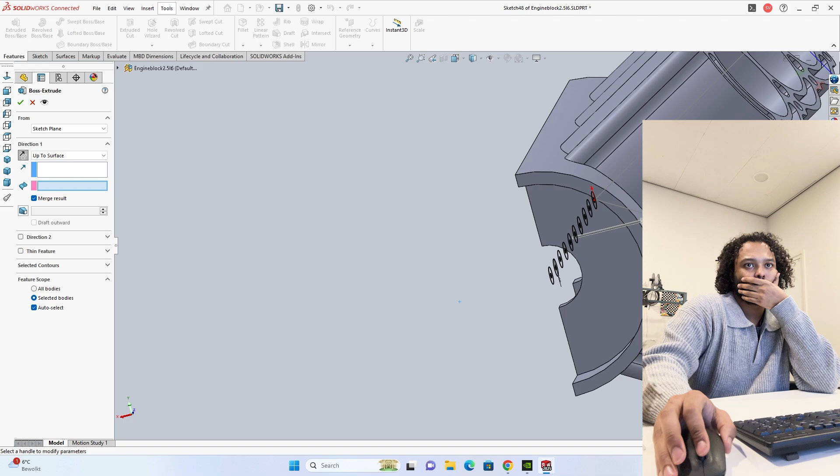But instead of keeping them like that, let's offset them, something like that. And are there any parts where the piston could still enter?

That's it basically for the engine block. For the oil pan, we didn't change anything to the crankshaft, the pistons, or the connecting rod in this video. I wanted to showcase how you make the rudimentary engine block a little bit more sophisticated by adding the water cooling for it.

So here you can see the water inlet, and then the water would flow through all of the passes of the cylinders and everything, and then be able to exit here.

And then we will also add pumps and belt drives to it, so that we can actually add the pumps that would drive those things. We've also added the channeling, the piping, the lubrication channels and everything for engine oil. That is basically what you can see here.

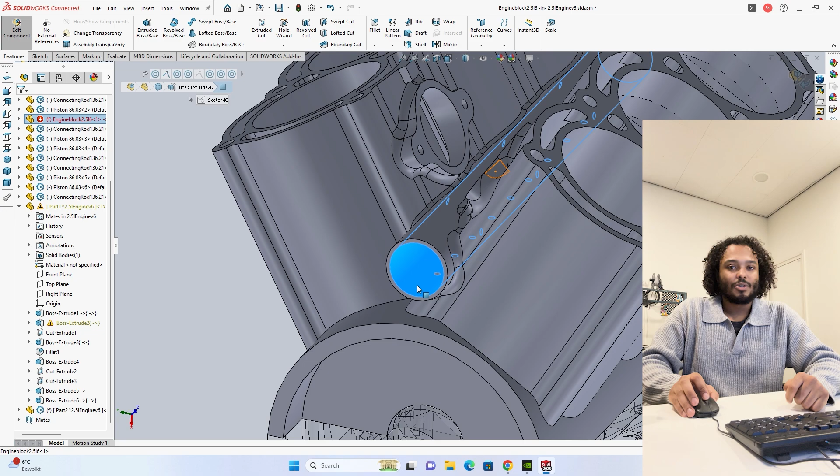That is one of the 3D printers finishing up behind me. I'm gonna restart that before I get out of here.

One of the final things we've added with the oil pan and everything was also to make sure that everything fits together and that it is capable of being bolted down by some standardized bolt patterns.

I'm also looking into creating a system where I could scale this down and actually 3D print it in real life to make a scale model version this big of it. But before I do that, I want to figure out how big the car around it is going to be, because then I might be able to use it in the future.

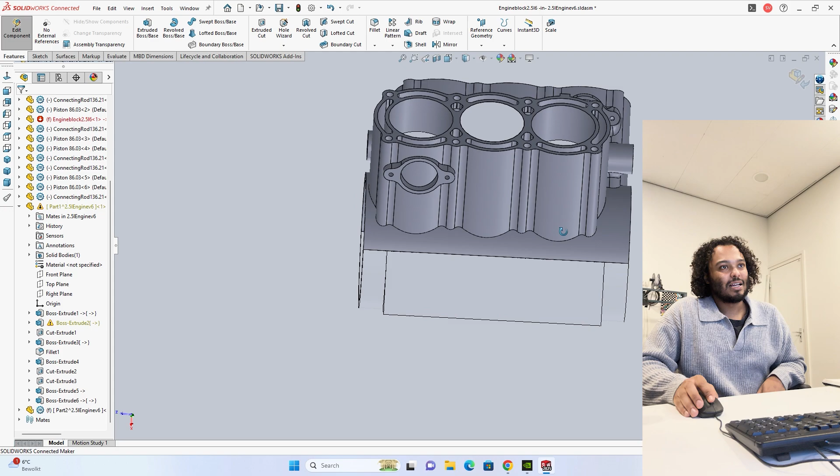But yeah, these type of things make me excited. I really love doing this, and I just can't wait to continue on this journey. These type of projects get me really excited, and I just love this. I can't wait to continue further in the process and see what else it brings.

In the next video, what I will be adding is the belt drive system, where to the side of the motor - this is the front section of the motor, so I'll probably be doing it here - we add all the auxiliary pumps and everything to it.

I'm not going to add the pumps in detail, but I just want to make place for it where we can add the starter motor to the crankshaft, and do all those type of auxiliary things. Then in the video afterward, or maybe even the same video depending on how long that takes, I'll be adding the cylinder heads.

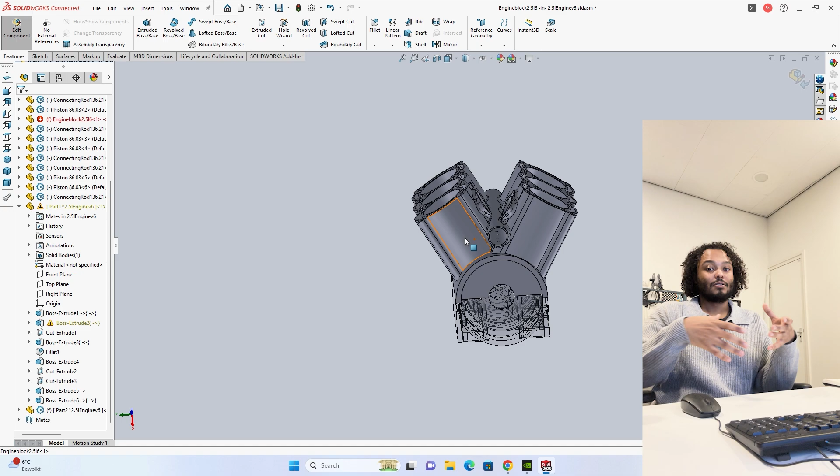Those will also be added to the belts and everything, so that's why I need the belt drive first. But this is getting good. I really like the way this is taking shape, and we're gonna design a full car around it. So this is not just gonna be the motor, but we're actually gonna make the rest as well.